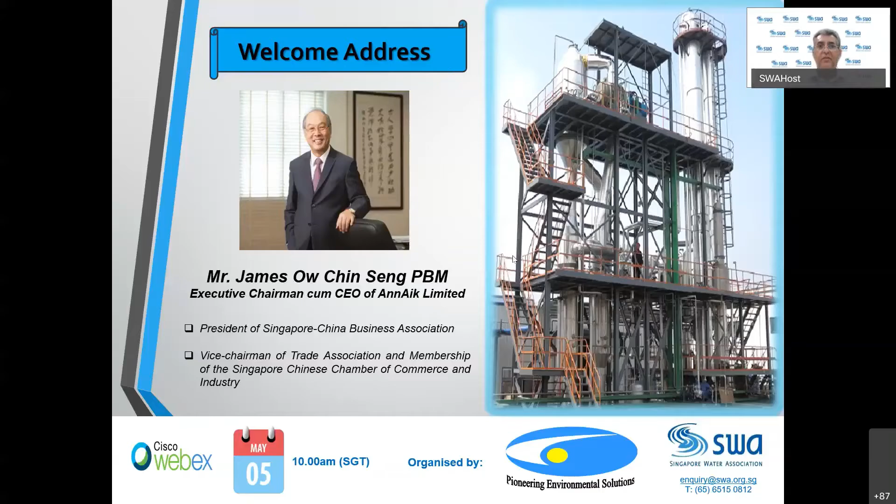Now it gives me the pleasure to invite our keynote speaker for today, Dr. Raymond Yang. Dr. Yang holds a doctorate degree in philosophy chemistry from NUS, a Master of Science in Chemistry from Shanghai Institute of Organic Chemistry, Chinese Academy of Science, and a Bachelor of Science in Chemistry from Wuhan University, China. Dr. Raymond joined AnnAik in May 2005. Currently, he is the General Manager / Director of Pioneer Environmental Technology Private Limited. Dr. Yang has published more than 10 articles in top scientific international journals, holding several patents in the environmental management field.

Over to you, Dr. Raymond Yang. Good morning, everyone. This is Raymond Yang from Pioneer Environmental Technology. Thank you, Vivian, Jaswinder, and the SWA team for organizing and planning this webinar. Thank you, Mr. Ow, for the welcome address. Today, I would like to share with everyone our experience in industrial wastewater treatment, particularly in pharmaceutical wastewater treatment. So this is the content for today's webinar.

Next slide, please. Introduction. As we know, Singapore industry is fast growing, particularly the pharmaceutical industry after COVID-19. 8 of the top 10 pharmaceutical companies have facilities in Singapore, manufacturing 4 of the top 10 drugs by global revenue. Worldwide big players like GSK, MSD, Novartis are all in Singapore.

Among the hazardous waste, the most difficult to treat is what we call 'four high' wastewater, with high COD, high salt, high volatile, and high toxic organics. Conventionally, this kind of wastewater is incinerated. But because of its low heat value, the incineration cost is very high since additional fuel is needed, and the high salt content causes choking problems and increases the maintenance cost for the incinerator.

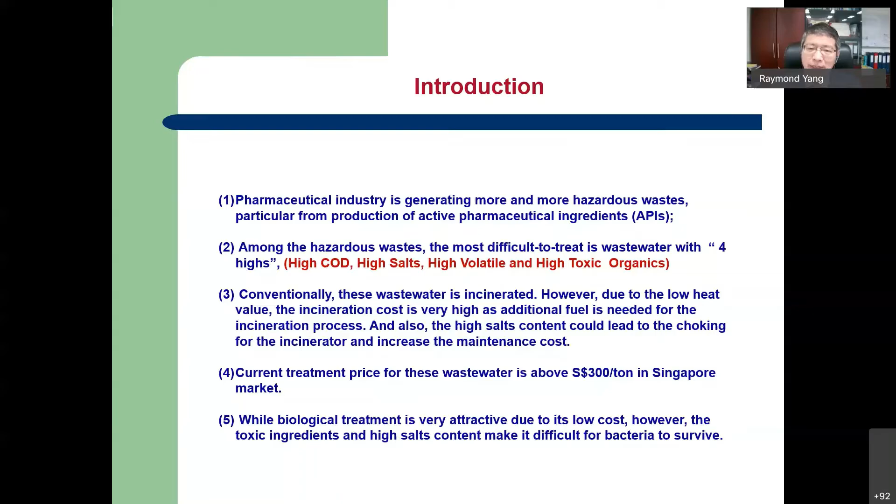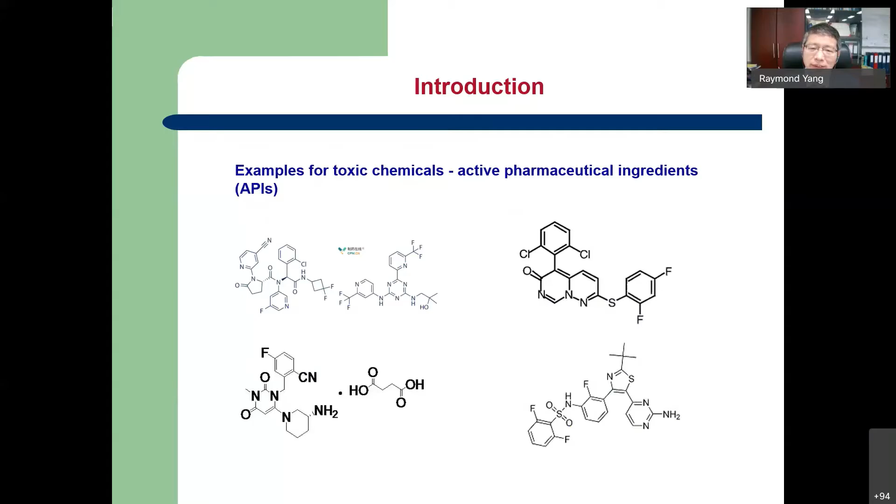Next slide, please. These are examples of API, active pharmaceutical ingredients, which are all toxic to the bacteria. You can see from the formulas that they contain fluoride, chloride, sulfur. These are all toxic elements to the bacteria and very difficult for them to digest. Next slide, please.

Let's take a look at the conventional wastewater treatment process. Conventionally, the customer needs to do clean production, waste minimization, new synthesis methods, and on-site waste management, treatment and recycling. The wastewater generated from production then goes to wastewater treatment, which has three parts. The first part is pre-treatment, which includes screening, oil and grease removal, stripping, evaporation, physical chemical treatment, and AOP, advanced oxidation process.

After that, the wastewater goes to biological treatment, which usually has anaerobic and aerobic processes, including UASB, MBBR, MBR. After biological treatment, because of more and more stringent requirements from the environment and the government, the wastewater usually also goes for post-treatment, which we call polishing or recycling. This includes AOP, adsorption, ion exchange, UF and RO.

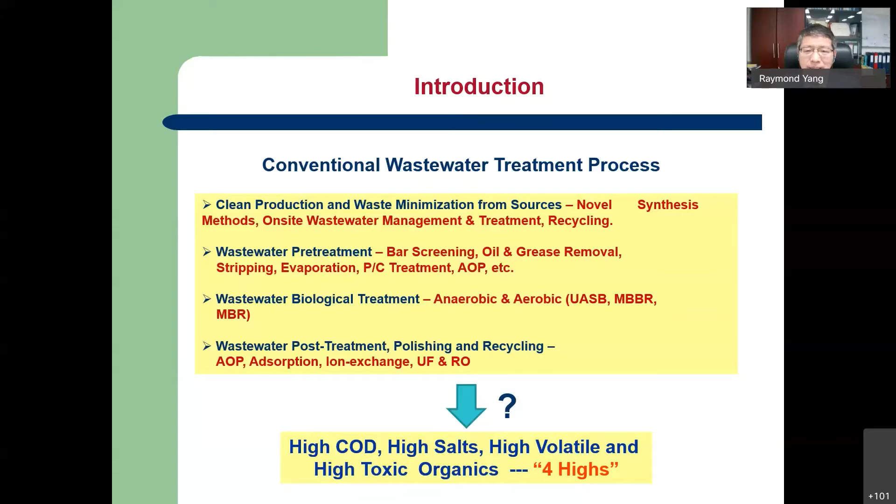Then we go back to the pharmaceutical wastewater. For this high COD, high salt, high volatile, and high toxic organic wastewater, how do we do the pre-treatment? Next slide, please. We focus on two pre-treatment technologies, the stripping column and the MVR. Next slide, please. We developed the technology for integrated wastewater treatment with the stripping column and MVR combination.

Let's take a look at what the stripping column is. The stripping process uses less steam to remove volatile organic compounds, VOCs, from the wastewater, and the concentrated VOC, usually a solvent, can be reused or incinerated. It can also sometimes be recycled if it is a single stream. Then what is the MVR?

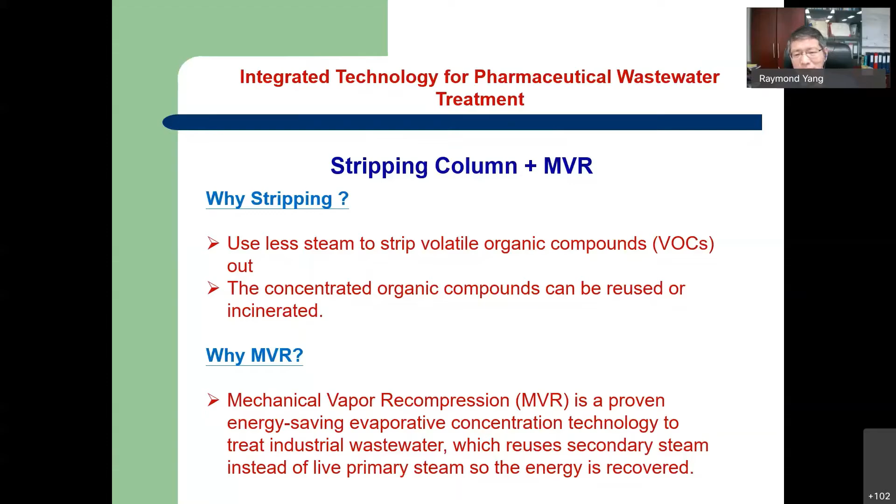MVR stands for mechanical vapor recompression, a proven energy-saving technology, and evaporation, as we understand, is a very good separation technology for solid and liquid. MVR reuses the secondary steam, so the energy is recovered and reused. That's why the MVR process is energy saving. Next slide, please.

Okay, now we talk about the stripping column and MVR. So why stripping column and MVR? So in principle, there are only two types of COD, basically: volatile and non-volatile. So if we remove the volatile COD by the stripping column, and the non-volatile organics by the evaporation process, in principle, all the COD can be removed.

Of course, this is quite an interesting question: after the stripping column and MVR, what COD is left? In principle, no COD is left, but in practice there's still some COD left. I will elaborate later. So, as just mentioned, most of the organics can be removed. But to what extent is quite difficult to say now. Only testing the actual performance will tell.

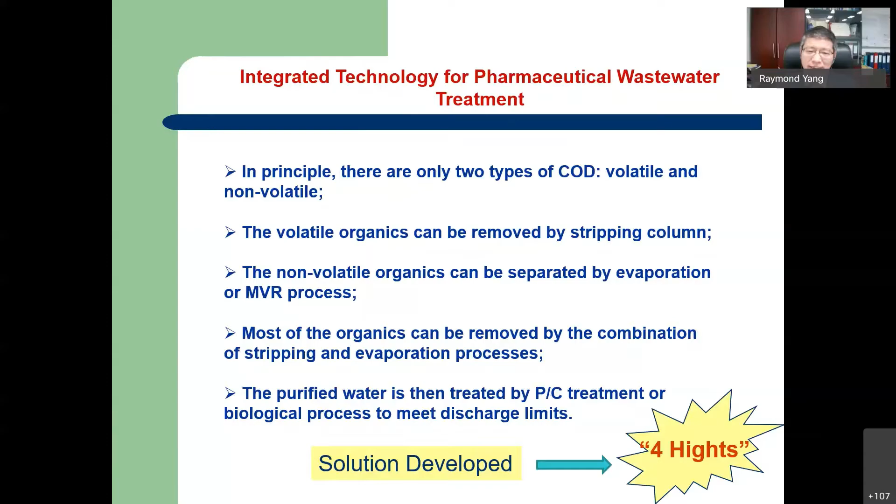So after these two processes, the wastewater, which we call purified wastewater, can be treated by P/C treatment or a biological process, because it is detoxified already. Next slide, please. Okay, this is the patent, the technology we registered in China. It is an invention patent. Next slide, please.

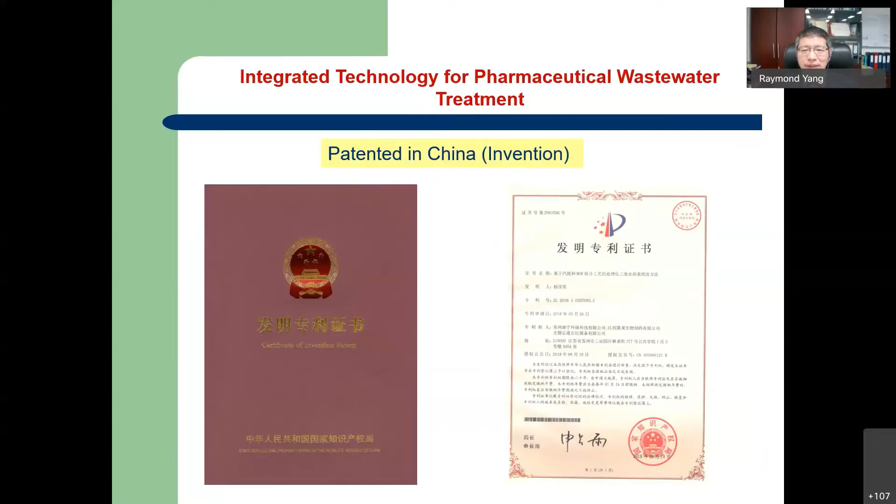Okay, so with this patent technology, high-COD wastewater can be treated. I will elaborate later on this part. It's non-specific, not like AOP. AOP sometimes works, sometimes doesn't work. But this technology works for every kind of industrial wastewater, basically pharmaceutical wastewater. Next slide, please.

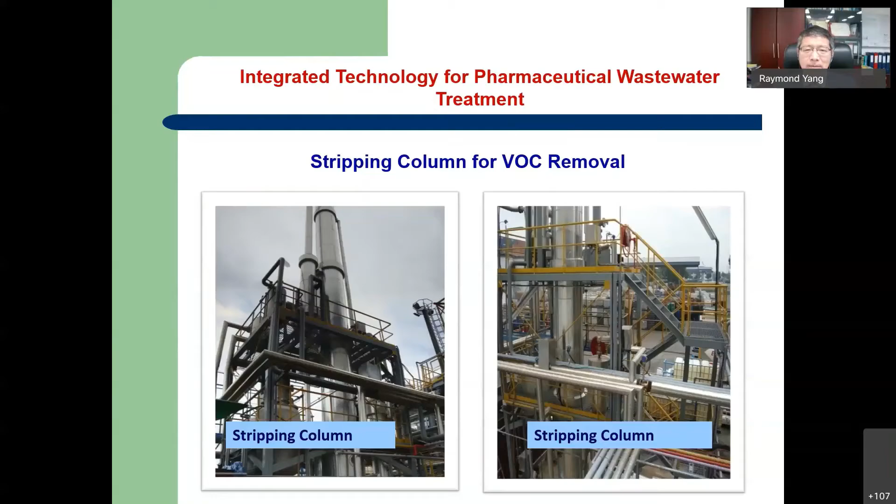Okay, this is a stripping column we set up for a hazardous waste management company in Singapore, which is the largest in Singapore and also the largest, most advanced in Southeast Asia. We set up this stripping column 10 years ago, and it is still in operation. Next slide, please.

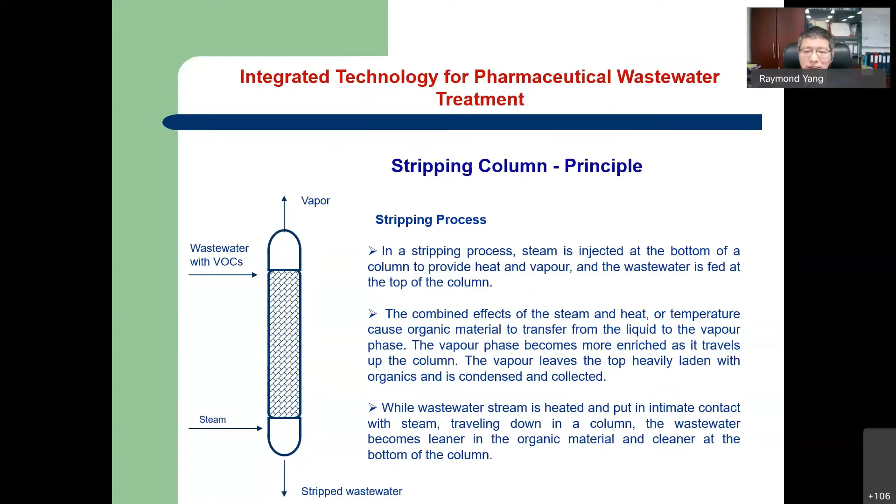Next slide, please. Okay, so how much VOC is left? This is also another interesting question. Before we set up the stripping column for the hazardous waste management center, we actually had no answer for this. After we set it up and ran it for several months, we found that the efficiency is very high: from a few hundred ppm VOC reduced to less than 10 ppm VOC.

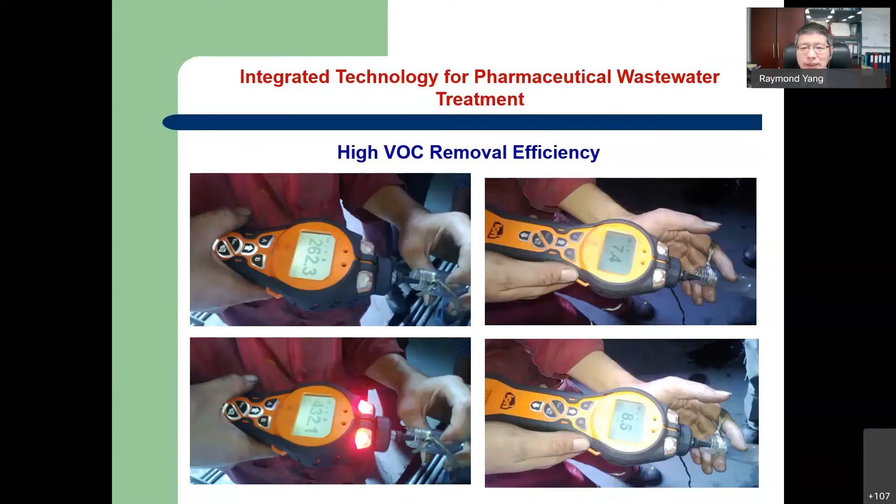Next slide, please. Okay, now we talk about the mechanical vapor recompression, MVR process. So why MVR? Basically, we want to save energy. In conventional wastewater treatment evaporation, after evaporation the steam is condensed by cooling tower water, and through the cooling tower water the energy is released to the air. Actually, all this energy is wasted.

the energy is recycled. And interestingly, in a large plant, the energy consumption is about 10 kilowatts for evaporation of 1 cubic meter per hour. This is very attractive already, because in Singapore, 1 kilowatt hour costs 14 Singapore cents, for example. So it's about 1.4 Singapore dollars for 1 cubic meter of fresh water, and this is almost comparable to the water cost already.

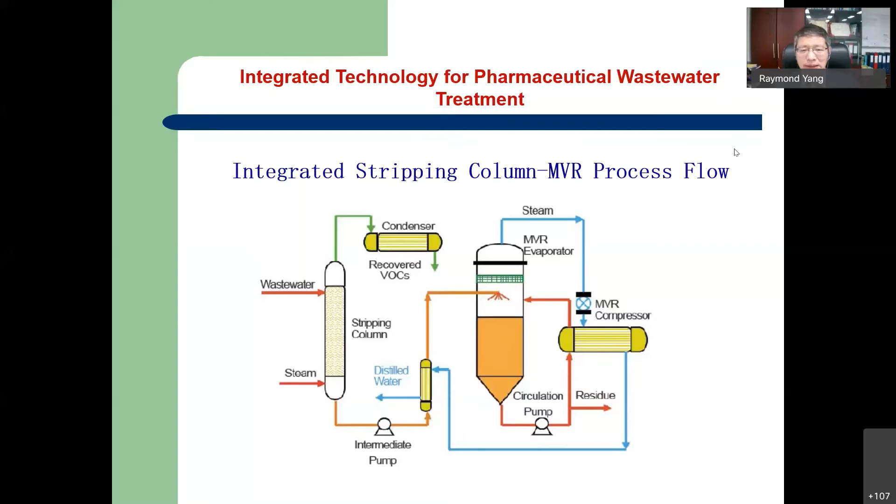Next slide, please. Okay, this is our first stripping column and MVR system built in China, in Jiangxi province, in the center of China. It has already operated for more than 5 years. And okay, this is the actual picture. Next slide, please.

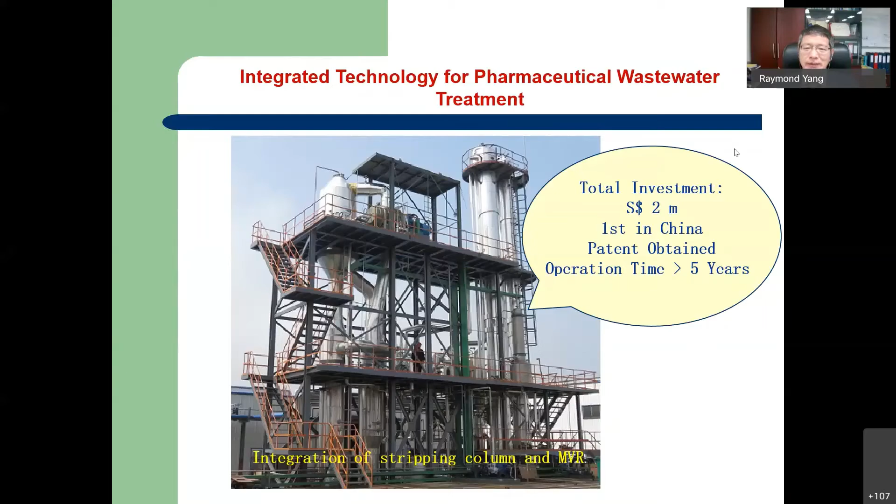Okay, another actual picture of the plant. On the right side, you can see the two columns, which are heat exchangers. So the wastewater is recycled, circulated inside, and the steam goes through the heat exchanger in these two chambers. Next slide, please.

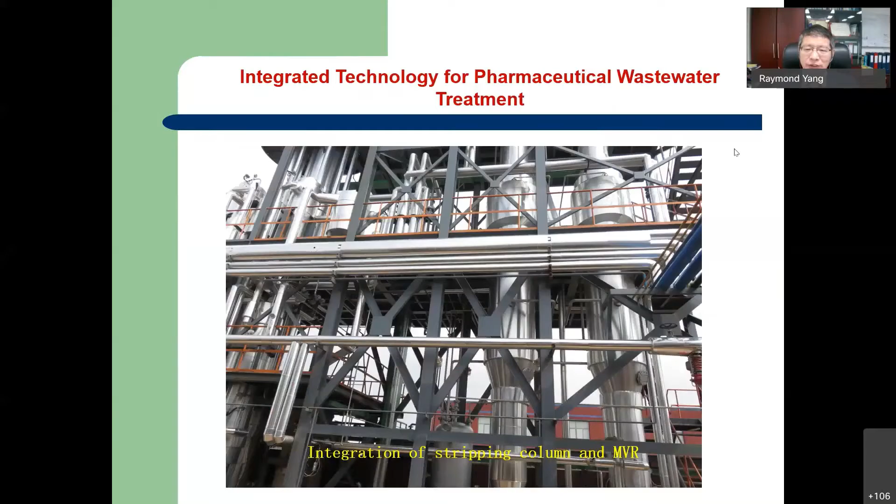Okay, this is the control system, the HMI for the MVR. The whole system can be operated by one person. Yeah. Next slide, please. Okay, this is the stripping column process, also the HMI control system. Next slide, please.

Okay, just now we mentioned that the COD is either volatile or non-volatile. Then one question is: after the stripping column and MVR, what is the COD level? So in principle, all the COD can be removed, right? But in actual performance, it's not so ideal.

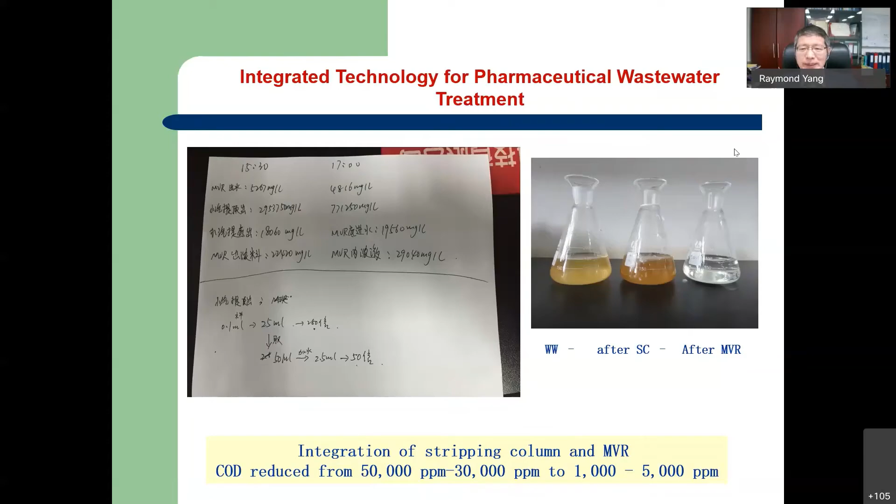So we found that the input COD, for example, 30,000 to 50,000, then after this stripping column and MVR, the COD is around 5,000. So this is a very interesting finding: regardless of the input, we always get distilled water with COD around 5,000 ppm. Next slide, please.

So this is the confidence when we talk with our customers: we just see what kind of solvent is inside, what kind of residue is inside. Okay, we will have the proposal for you. Sometimes people ask whether they need to do a lab test. Actually, we also have findings from other plants. That's why we sometimes have the confidence to say, okay, no need for a lab test.

So you can see the COD in the red box: the original wastewater is 140,000. After the stripping column, the top part, the VOC part, is 350,000. Then the middle part, very interesting, is only a few thousand, sometimes less than 1,000.

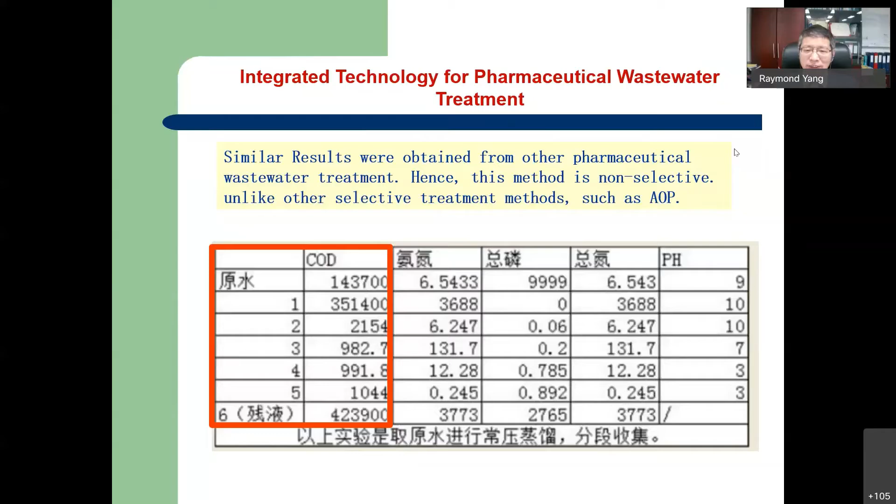And the bottom part, you can see again is almost 500,000 COD. So in this wastewater, we remove the volatile and the non-volatile, so most of the COD is removed. Actually, in this wastewater, there's no need for biological treatment; just one AOP can meet the discharge limit of 500 ppm already. So this is different from the AOP; this technology is universal. Next slide, please.

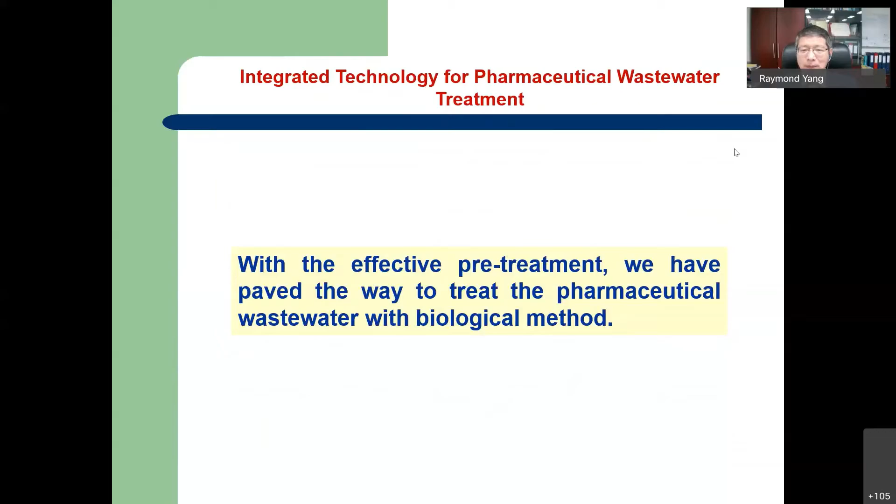Okay, now with the effective pre-treatment, we're very comfortable treating the wastewater with a biological method. Next slide, please. Okay, this is a whole biological treatment plant in China, in a single pharmaceutical company. It's not in a waste management center. So it's quite big.

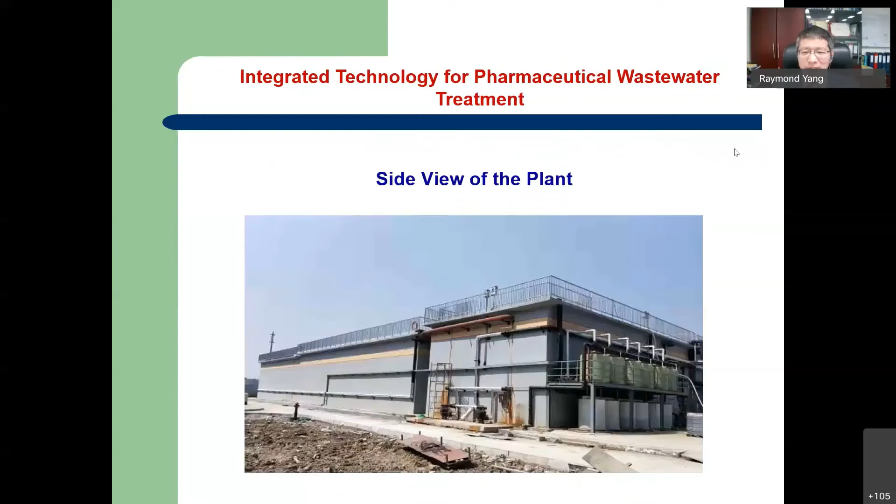Next slide, please. The side view of the plant is a wastewater plant. Yeah, it's not the chemical plant. Next slide, please.

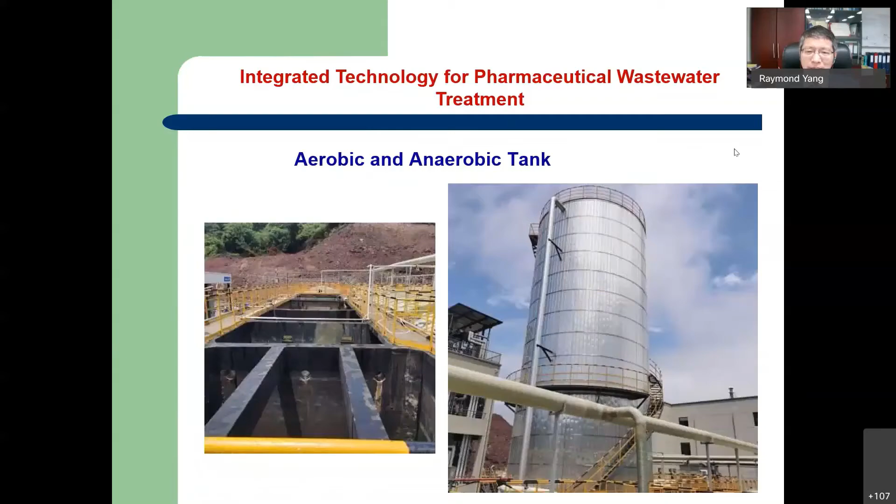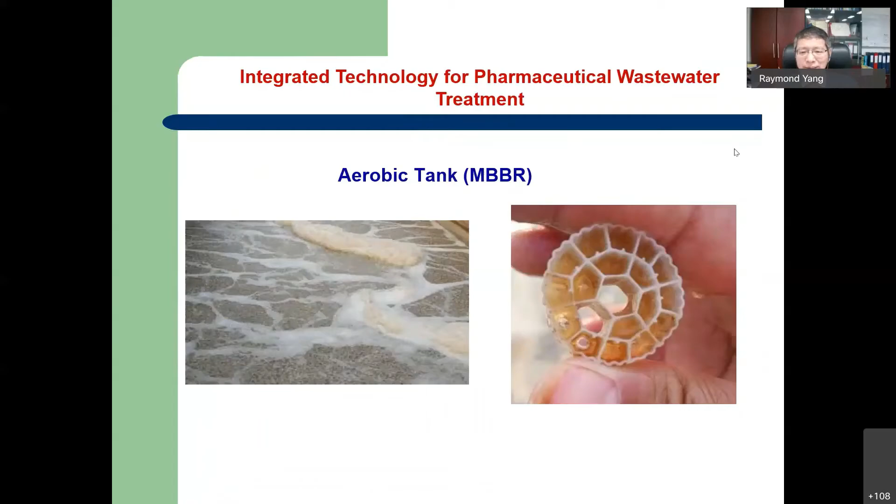Next slide, please. Okay, after this micro-electrolysis, it goes to the anaerobic process. These are conventional anaerobic processes. Next slide, please. And we also employed the MBBR for our aerobic process. Next slide, please. Aerobic tank, MBBR. We can combine them together.

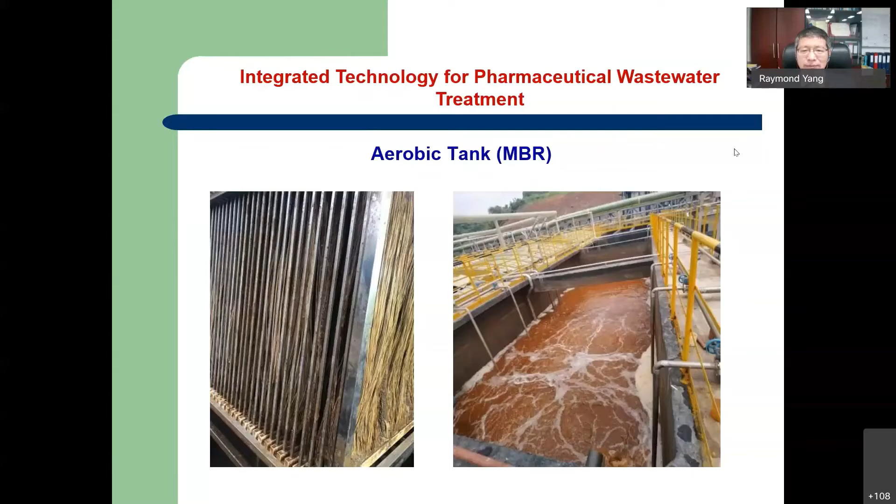Actually, this wastewater treatment plant is in Hangzhou, and is near a reservoir. Yeah, it's very stringent. Next slide, please. Okay, chemical dosing system. Next slide, please.

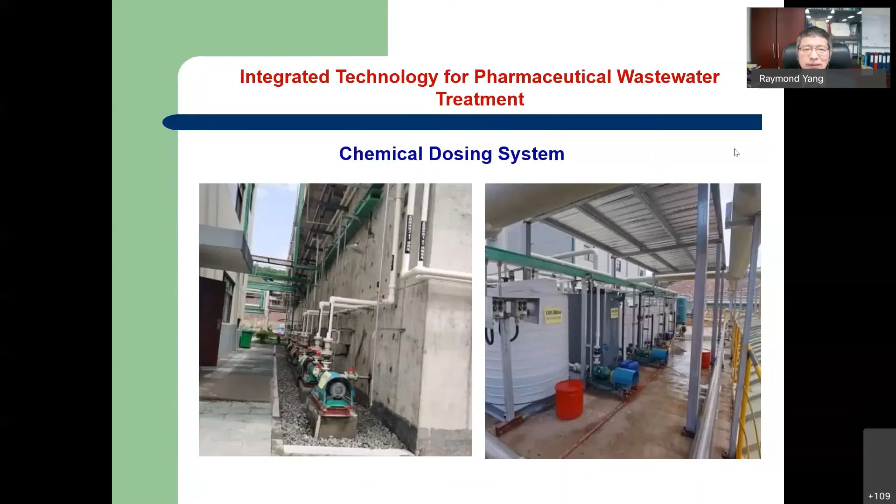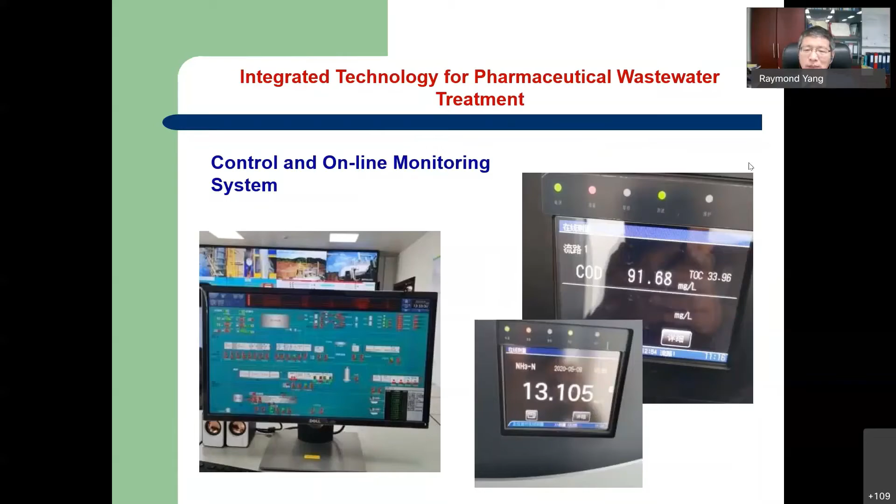Next slide, please. Okay, so up to now, we have the pre-treatment and the biological treatment. So we have this integrated technology for pharmaceutical wastewater treatment. It's stripping column plus MVR to remove the volatile and the non-volatile organics and the salt. And then micro-electrolysis to further detoxify the residual chemicals. Then the anaerobic process and the aerobic MBR PTFE membrane. So this is the treatment process to meet the discharge limit regulations.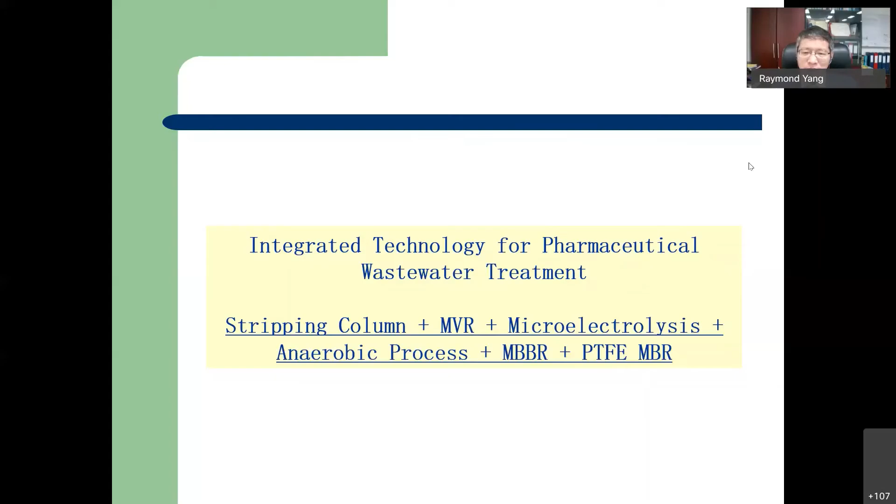Then after a while, I will talk a bit about zero liquid discharge. Zero liquid discharge means that the whole wastewater can be recycled, almost no discharge. Next slide, please.

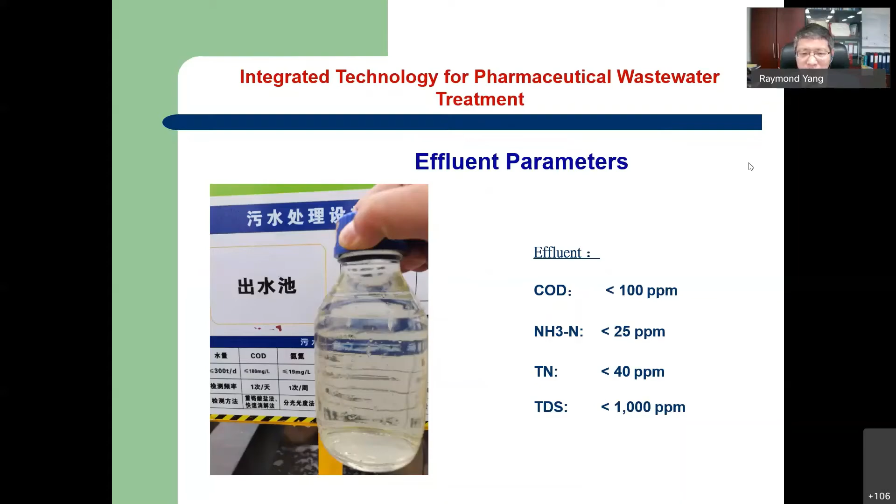Okay, then this is our output. We achieved COD less than 100 ppm, ammonia nitrogen less than 25, total nitrogen at 40, TDS less than 1,000. So after this treatment, this wastewater will be channeled to the centralized wastewater treatment in the chemical industrial park, to meet at least standard A, which means COD less than 50 ppm. Now the requirement is more to meet surface water, COD less than 30 ppm, in order to discharge from the centralized industrial park wastewater plant. Next slide, please.

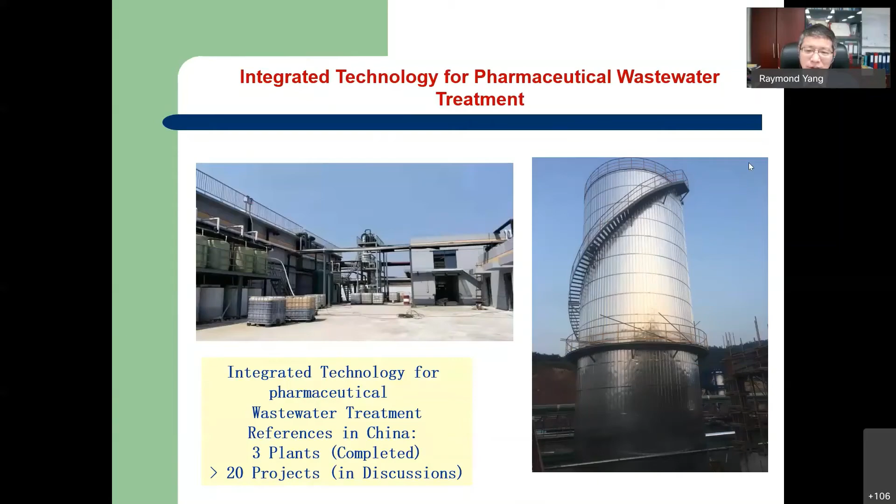So far, we have completed 3 plants in China, and we have more than 20 projects in discussion, all over China, some even very far, in Mongolia or Xinjiang. But most of our customers are near the Shanghai area, in Jiangsu and Zhejiang province. Next slide, please.

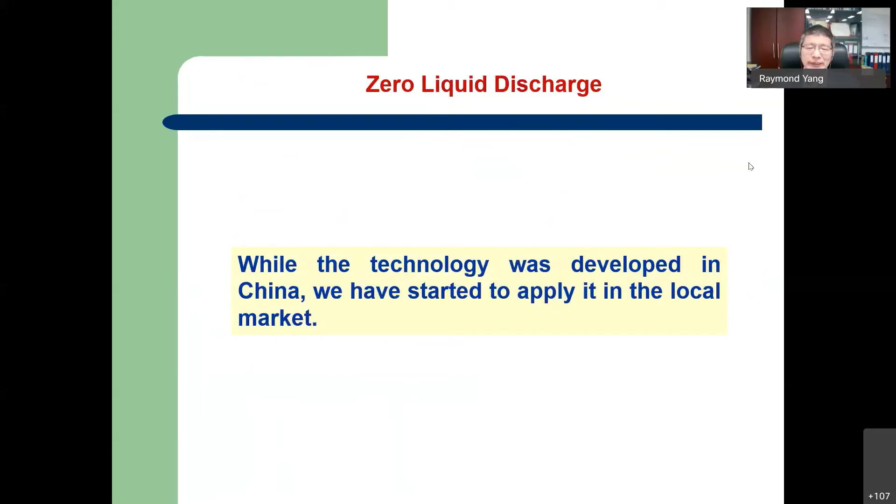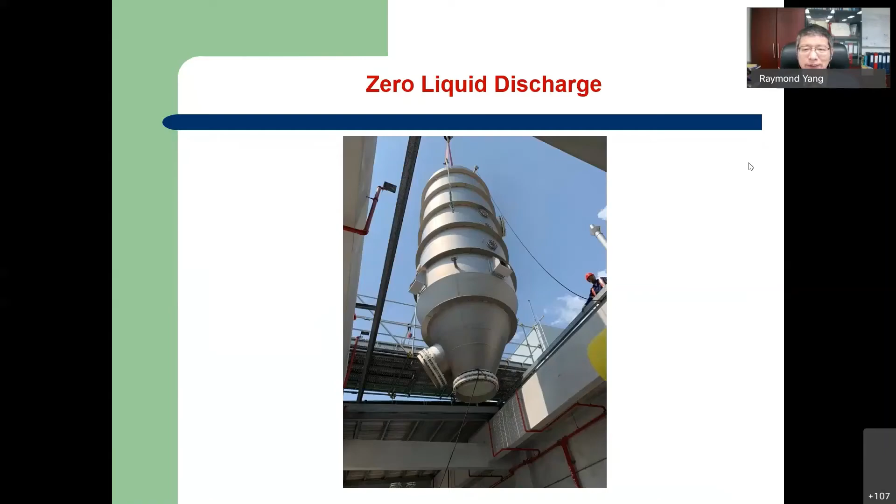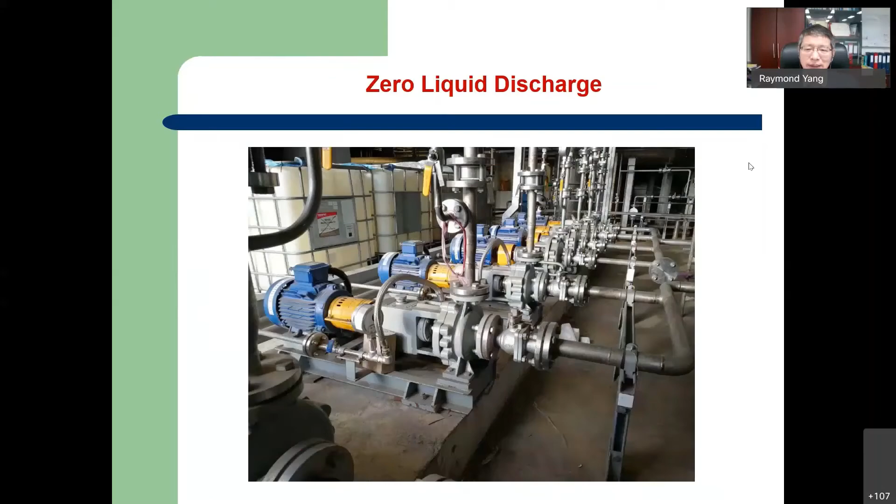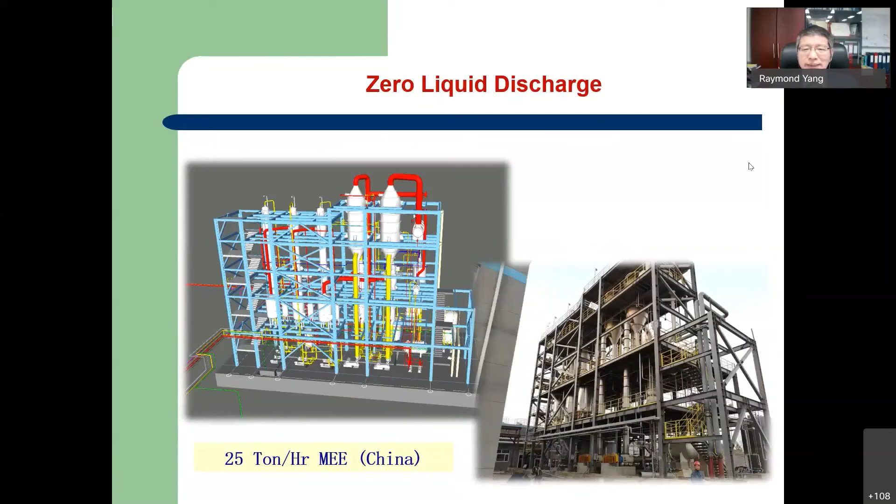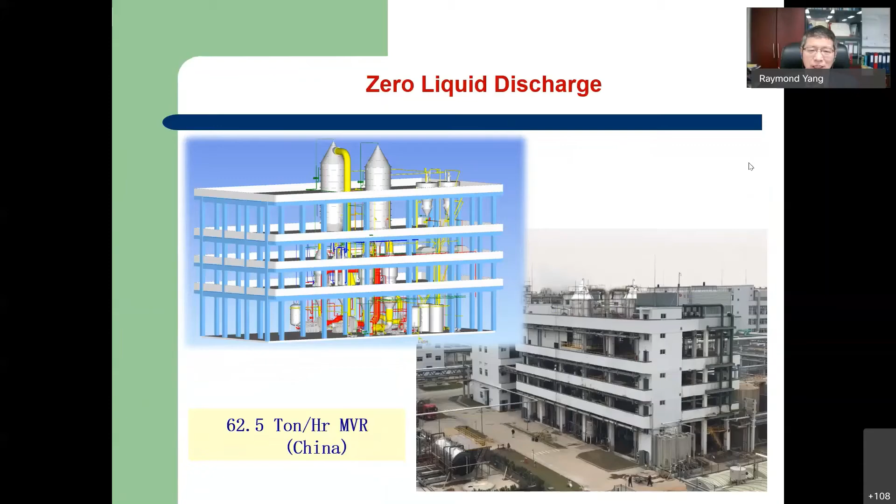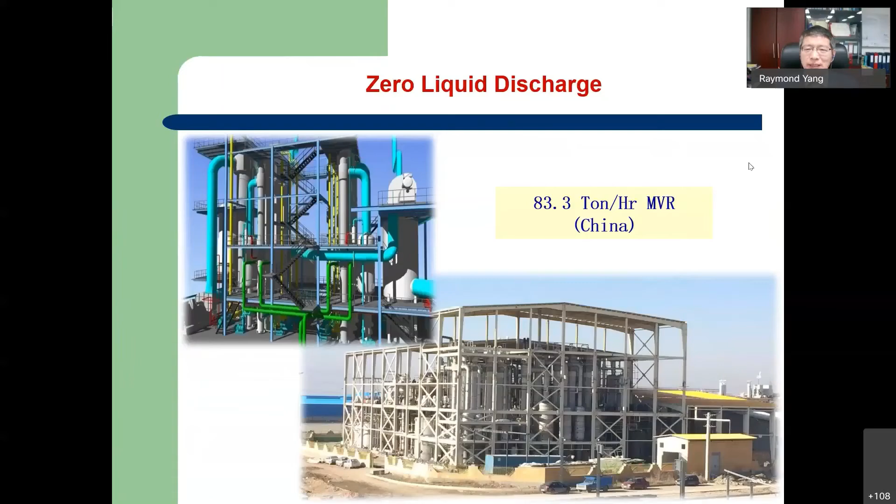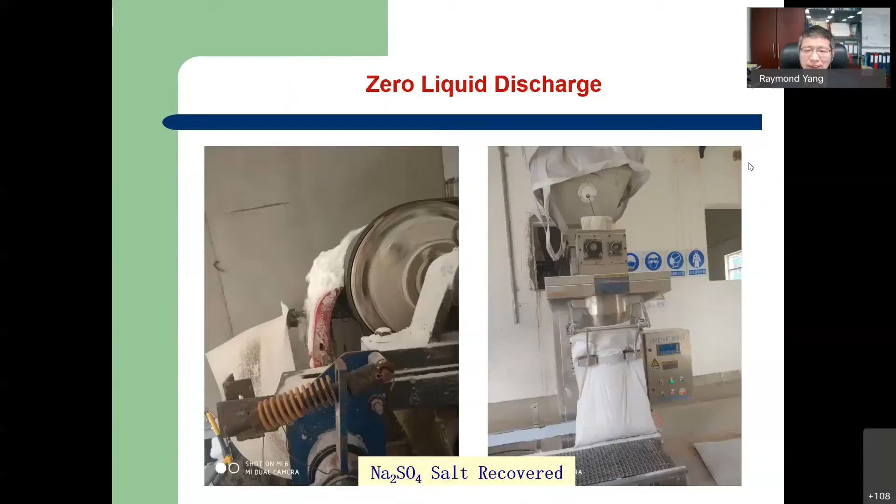Next slide, please. Okay, so after the MVR process, we get the salt, usually two types: sodium sulfate and sodium chloride. This picture shows you the recovered sodium sulfate. Next slide, please. Okay, you can see the color is very white. Its purity is very high, more than 98%, so it's industrial grade. The salt is recovered. Next slide, please.

Okay, now let's take a look at the zero liquid discharge. We show you the 3D model of a plant.

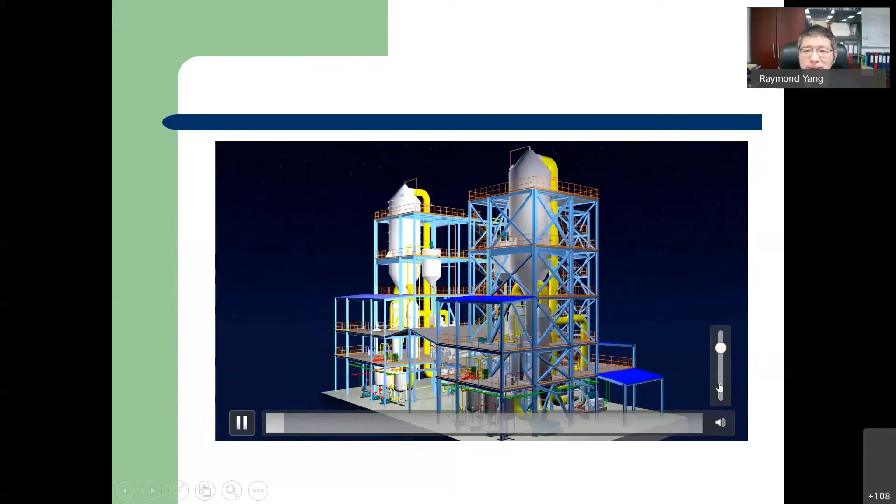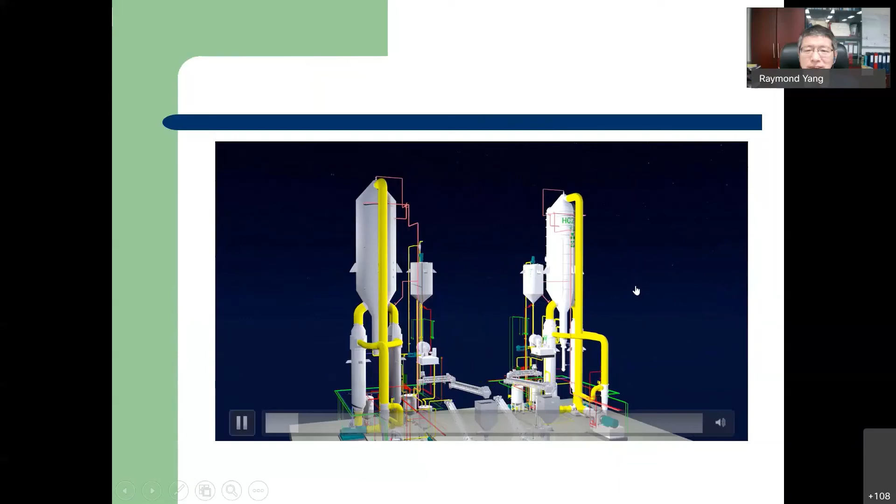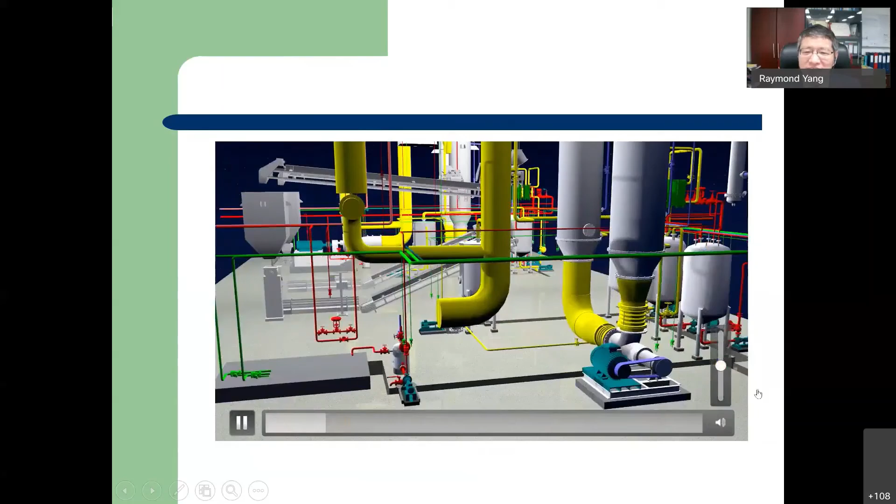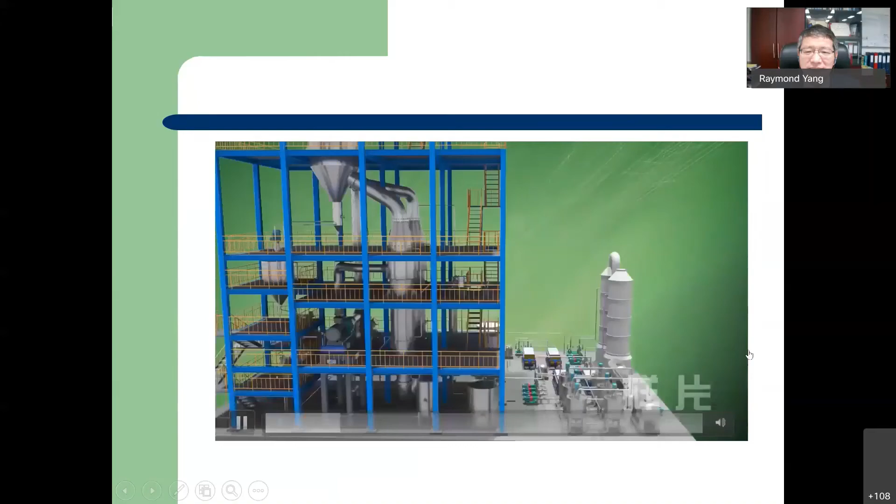Never mind. So this is the crystallizer, and the evaporator. We go to the heat exchanger, and this is the circulation pump. So usually we make it modular. This is the MVR module, and this is the post-treatment module.

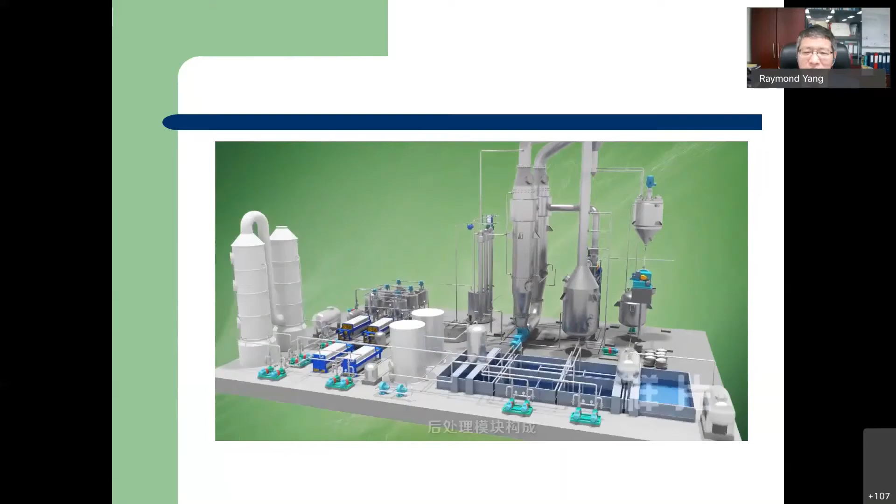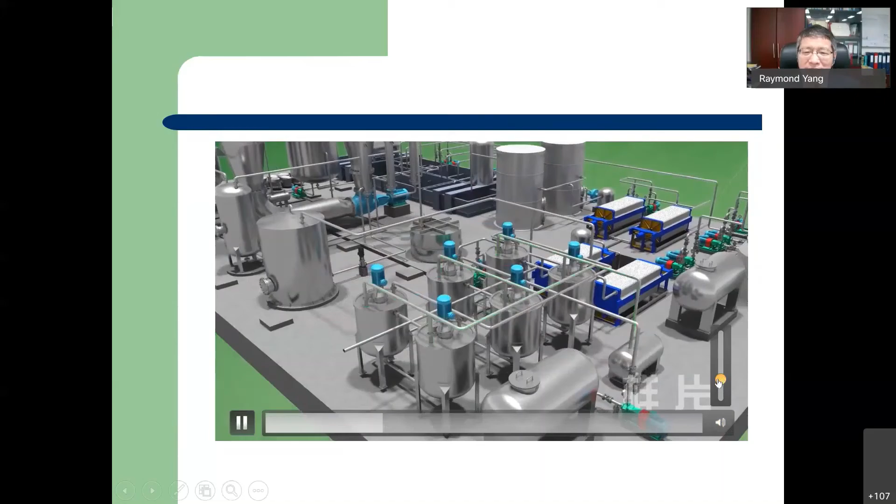When the system is in operation, usually we have pre-treatment for the wastewater: neutralization, activated carbon, and so on. After that, we go to the filter press to filter off all the particles. Then it goes to the tank.

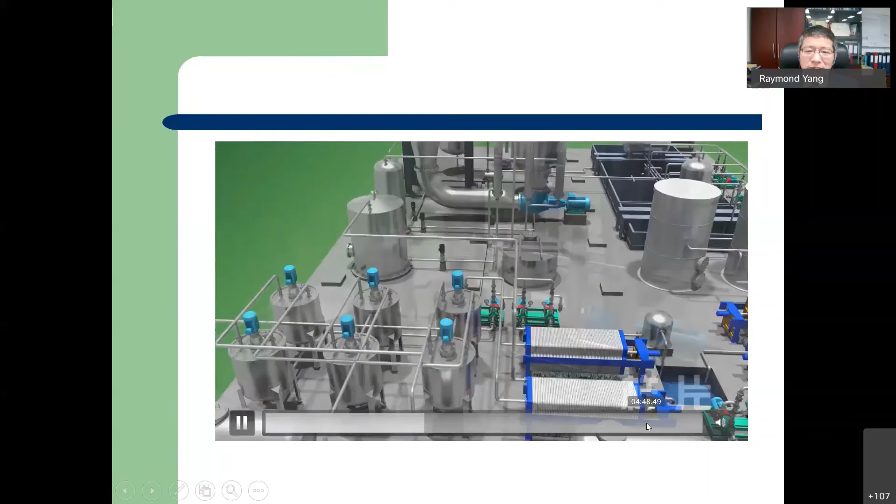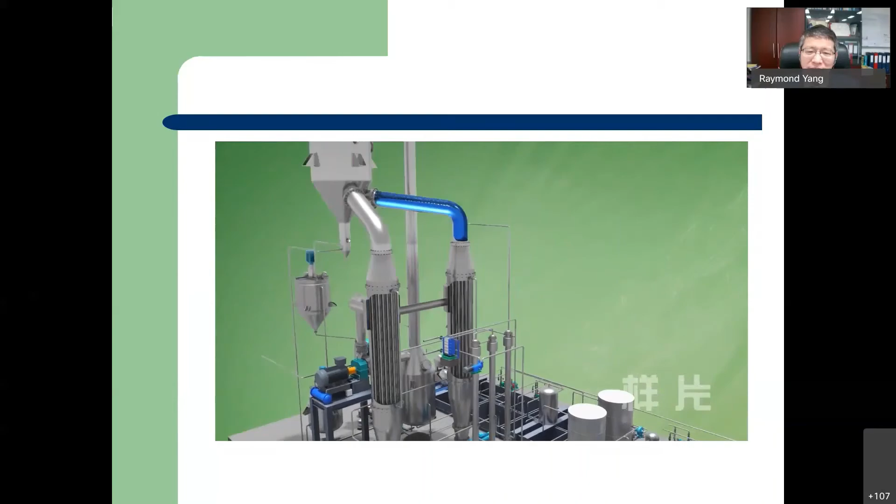Then you inject it into the buffer tank, and from the buffer tank the water is pre-treated and preheated. After preheating, it goes to the MVR process. For the circulation in the system, you can see there are two heat exchangers. After the heat exchanger comes evaporation, and the blue color is the steam.

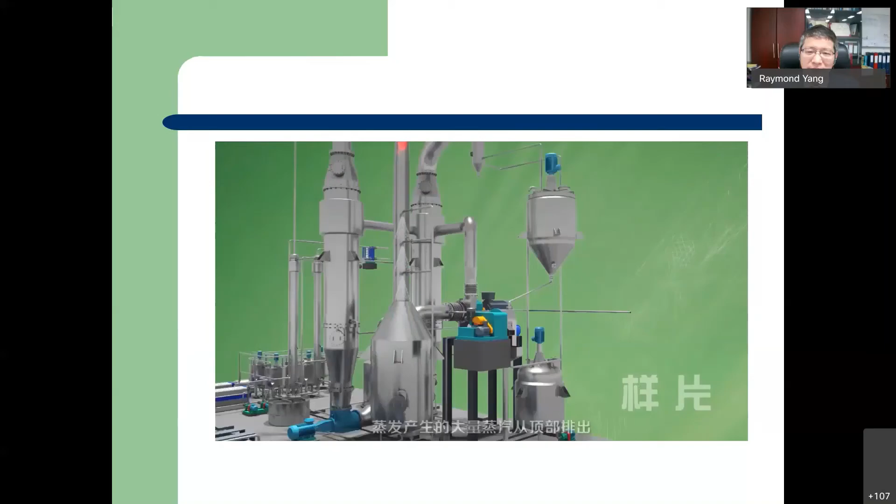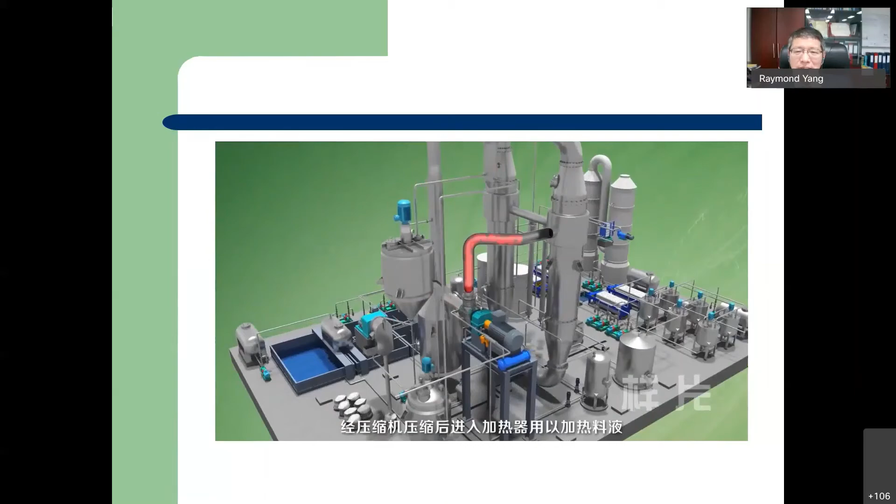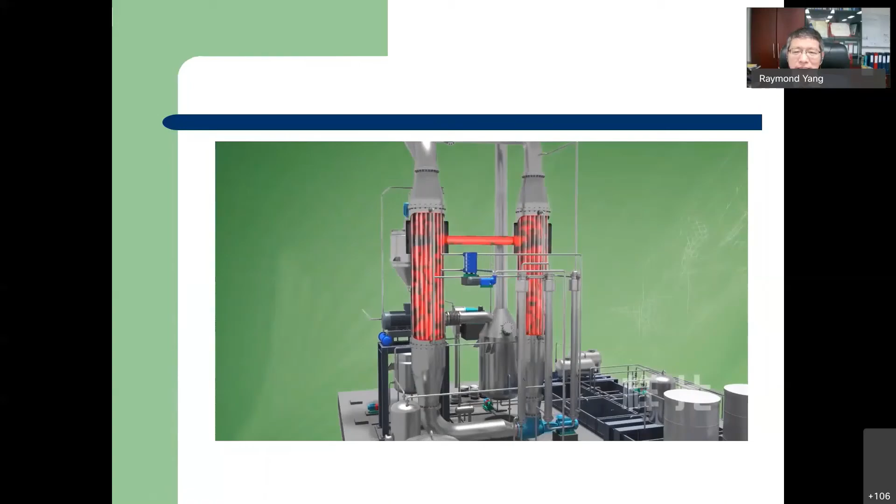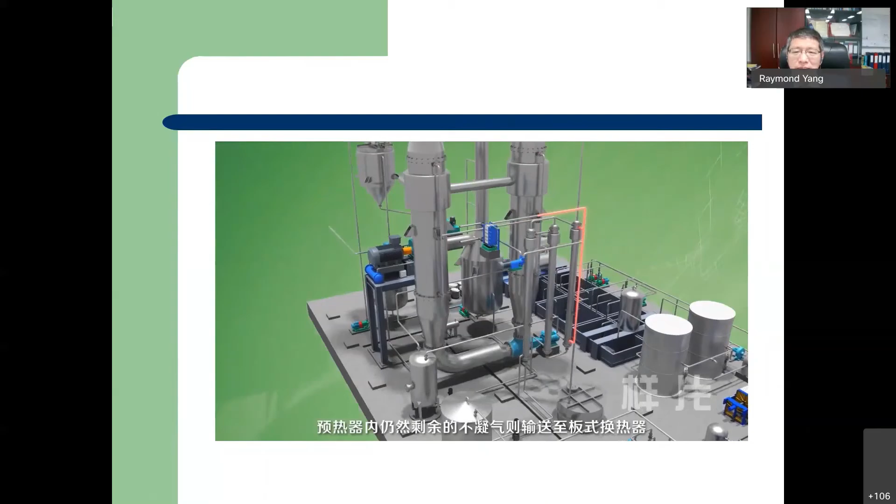The steam goes through liquid-gas separation. After separation, the steam goes to the compressor. After compression, the steam has a higher temperature and higher pressure. Then the steam is reused in these two heat exchangers. The non-condensed material's heat is also recovered, then collected.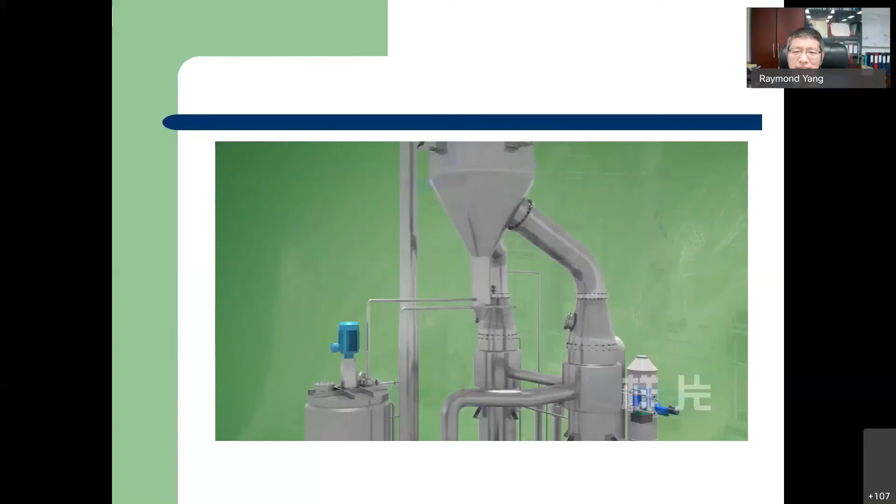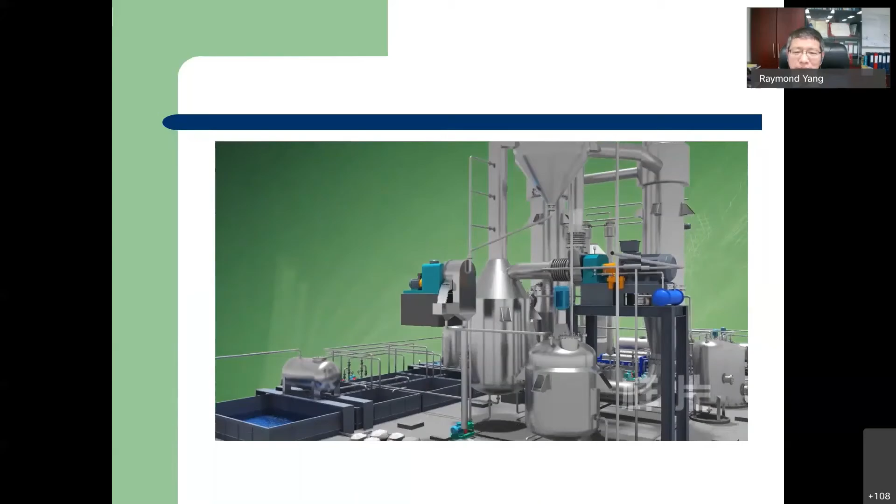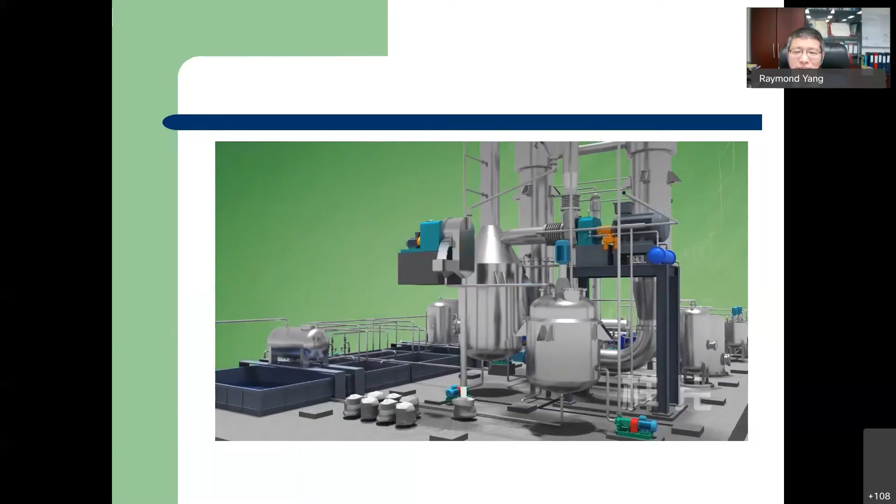As we just mentioned, in the preheat the heat is recovered. Then the concentrated material goes to the crystallizer and the decanter. The decanter separates the liquid and the salt. The salt is recovered and collected as a product. Then the mother solution goes to the tank and goes to the system again, MVR again. Sometimes if we have a high COD, this mother solution should be treated.

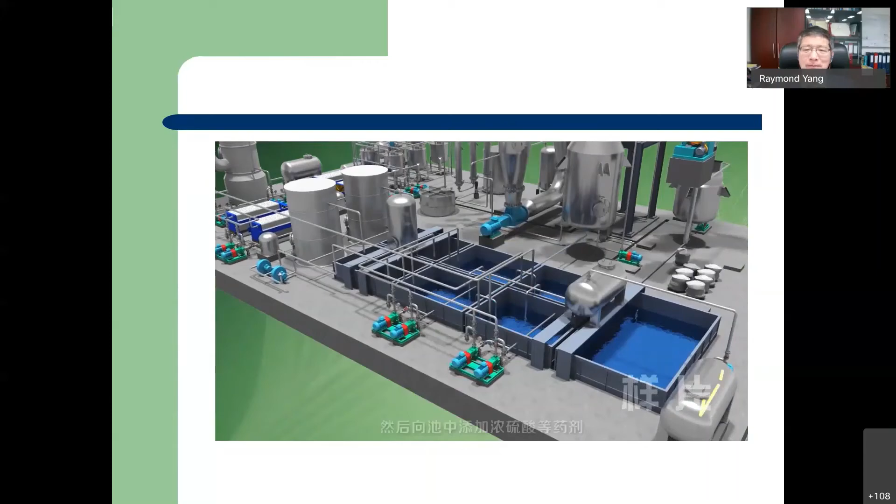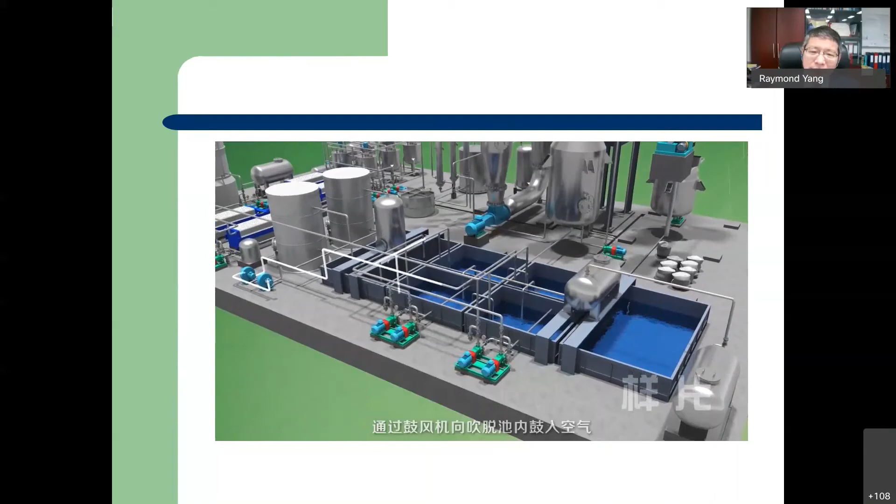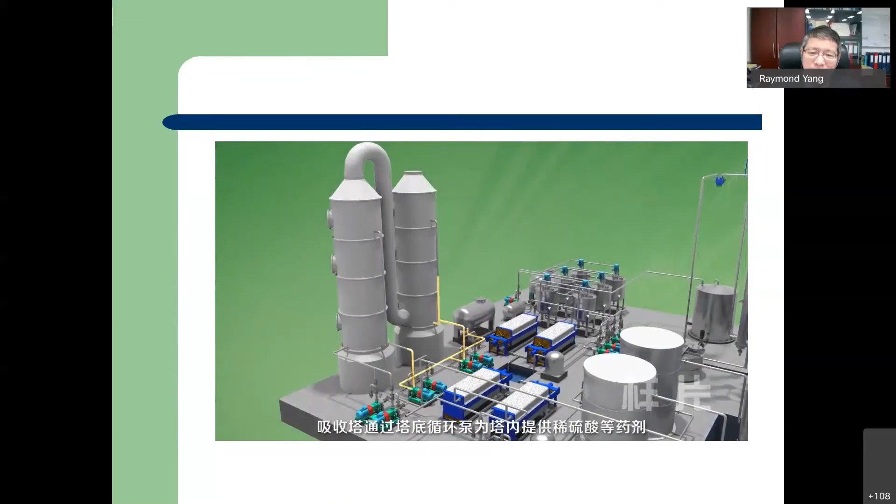After evaporation, it goes to the post-treatment. The post-treatment sometimes also needs chemicals, and AOP can be applied to remove the small amount of chemicals. Sometimes if volatile organics are involved, then you have them blown out. Sometimes we also use micro-electrolysis.

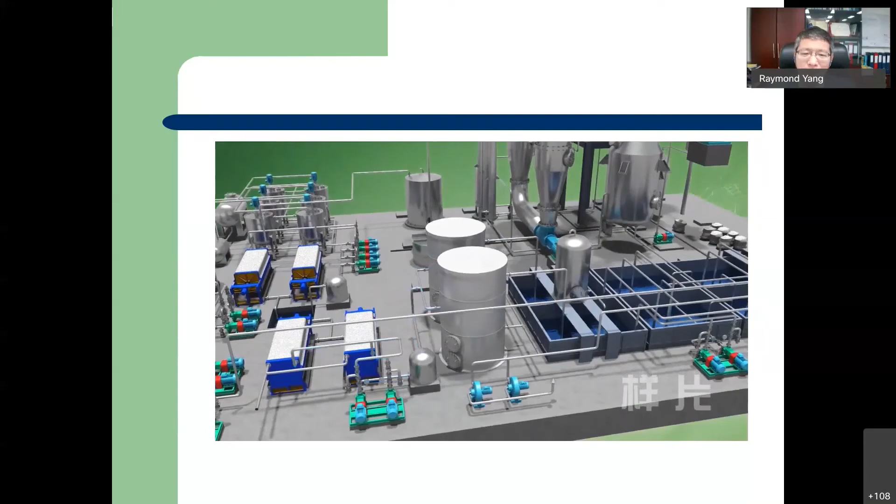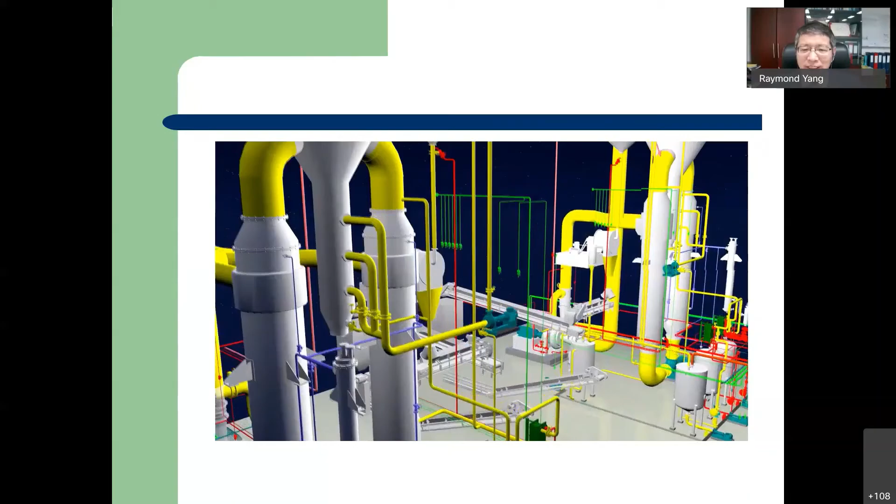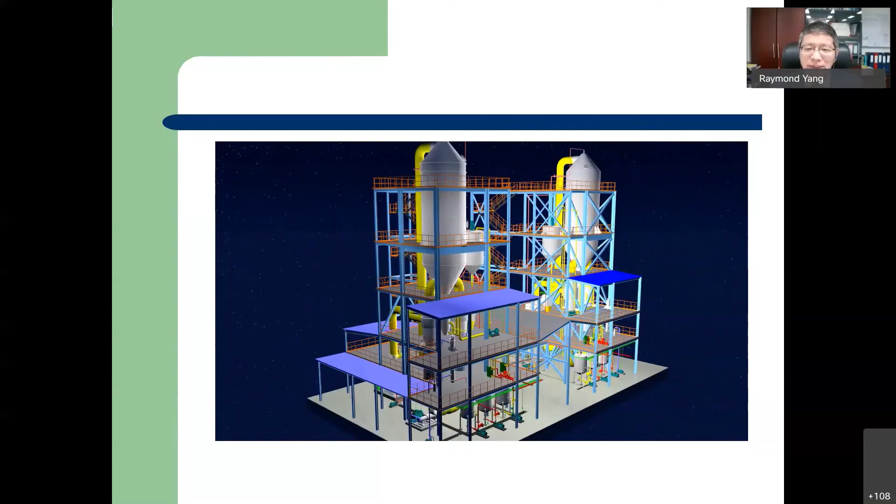After micro-electrolysis, we remove the solids with the filter press. Only after detoxifying the wastewater do we pump the evaporated water into the biological process. So this is a simple 3D process for the treatment. Next slide, please.

Can you hear me, Jasvinda? Hello? Yes, we can hear you, Dr. Yang. Can you hear me? Okay, because somebody said they cannot hear me.

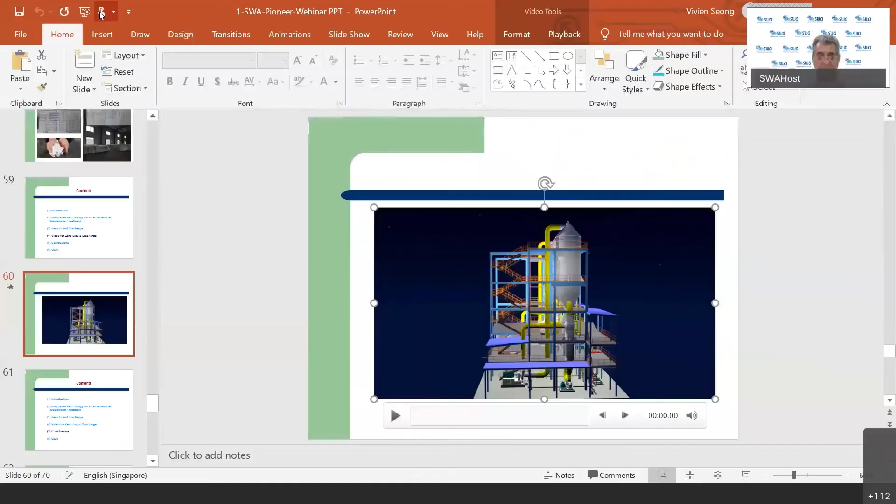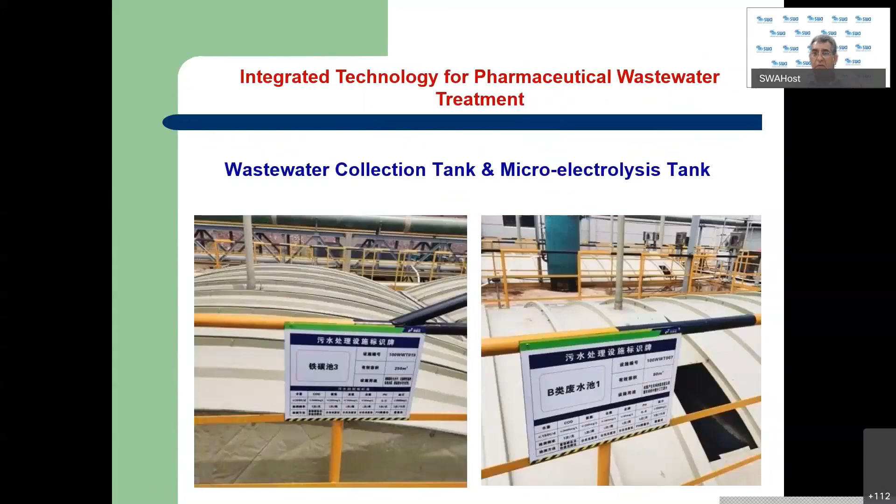There are a couple of questions here. The first question is from Mr. Kishore Dobira. His question is, 2 million investment cost for what capacity? So for the capacity, for example, 5 cubic meter per hour MVR process, usually about 2 million to 4 million Singapore dollars, because the whole system is in titanium.

The second question, also from Mr. Kishore, is MVR also needs some steam apart from power. Yeah, that's right. For the initial start-up stage, and also for some seeding process, the compressor needs some steam. You're right.

The third question, from Mr. Jonathan Lee: what is the market potential and additional purification cost for the recovered VOC from the stripping pretreatment? It's a very good question. Usually, if the waste solvent is a single type, then it is very useful to be recovered.